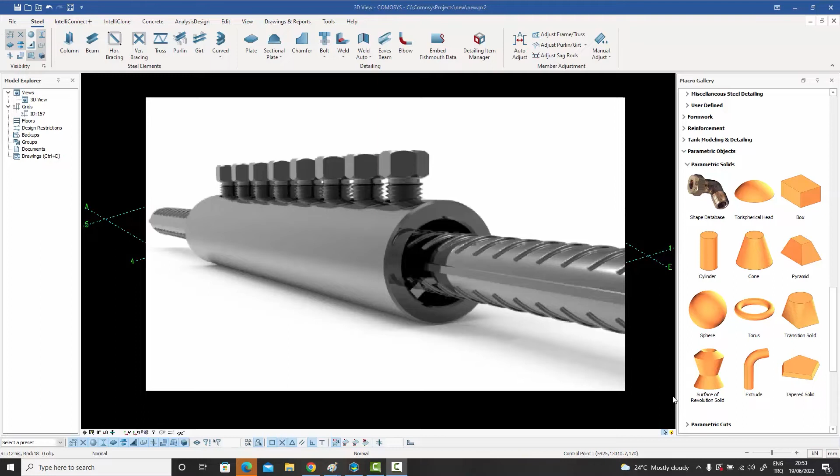So what could be examples of things you could make with the shape editor? It could be things like rebar couplers, for example, which are sold off the shelf. Different manufacturers have different types of couplers, and they all have different geometries. But the common thing is that they're available off the shelf. You just need to know the product code, and you can order as much as you want. So you could model your rebar couplers.

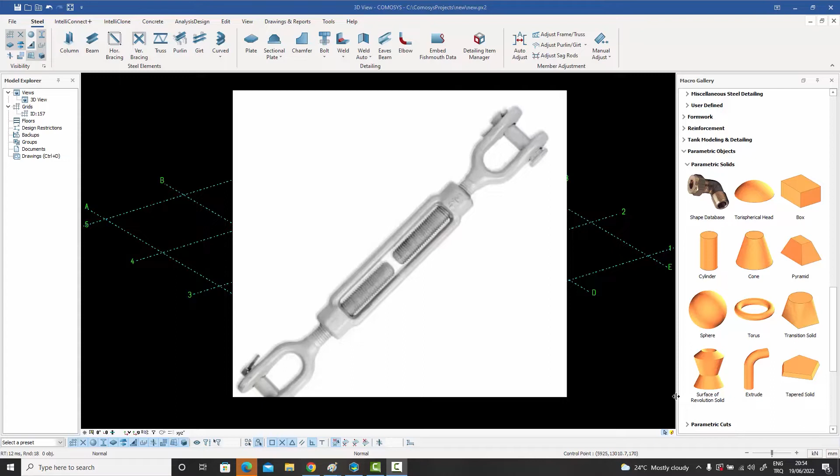Similarly, you could model if you have some standard embedded part in your concrete, which basically you just buy from some manufacturer. Or what you could also do is maybe model your turnbuckles, for example, in steel connections or in cable connections. This is once again an example of something which you buy off the shelf. So these are the kinds of things which you would typically create in Comosys using the shape editor.

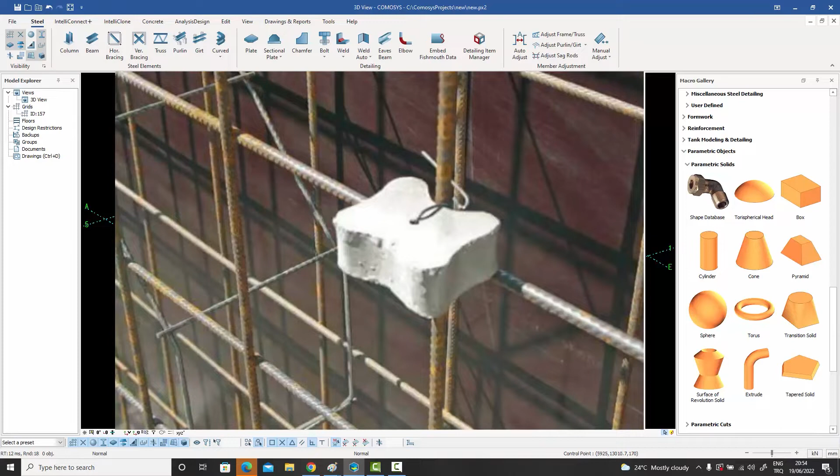For example, you could also use rebar spacers, which are used heavily in the concrete industry when you're laying the steel to ensure that the clear cover is maintained from all sides. All these are examples of things you might want to model in your 3D model, and you might want to show them. And for that, a very good idea would be to use the shape editor.

So how do we go about creating these shapes? Well, what we do is simply create these shapes by using these primitives on the right hand side. And it's not just limited to primitives. You can cut them if you want. You can use all your cut commands. You can even use the normal steel plate commands, for example.

Or even your beam column command. So if you're creating a little complicated object with a little profile in there as well, you can do all that. You can basically use any shape, and you can use multiple shapes, and then it will be combined into one final shape.

So you can use the primitives, like I said. You can create extrusions, you can create surfaces of revolution, you can use the basic primitives of a box, a cylinder, a cone, a pyramid, a sphere, a torus, or a transition solid, for instance. All these shapes can be used, and you can cut them, you can modify them, and finally the final shape which you are satisfied with will be put into the shape editor.

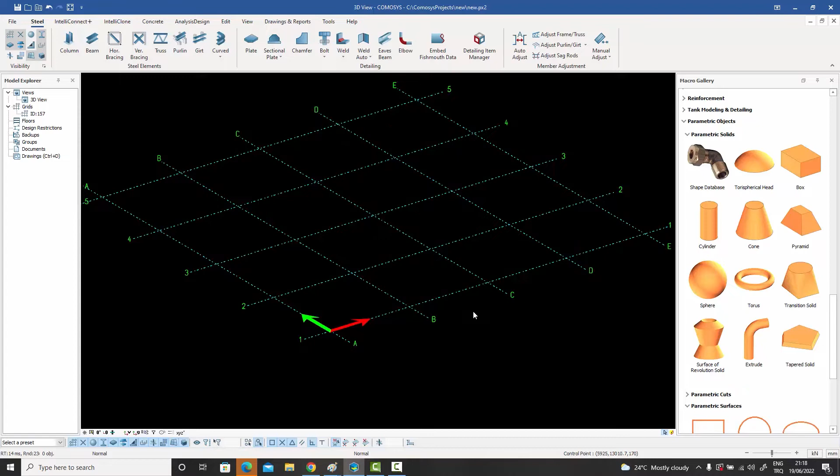So let's do a simple example over here. Let me zoom in and let's create a little box. Let me just select a point and right click, and immediately a box is created. Let me double click on the box. As you know, these are parametric objects, so you can double click on them and modify their properties. So I'm going to make the sides 200 on both sides.

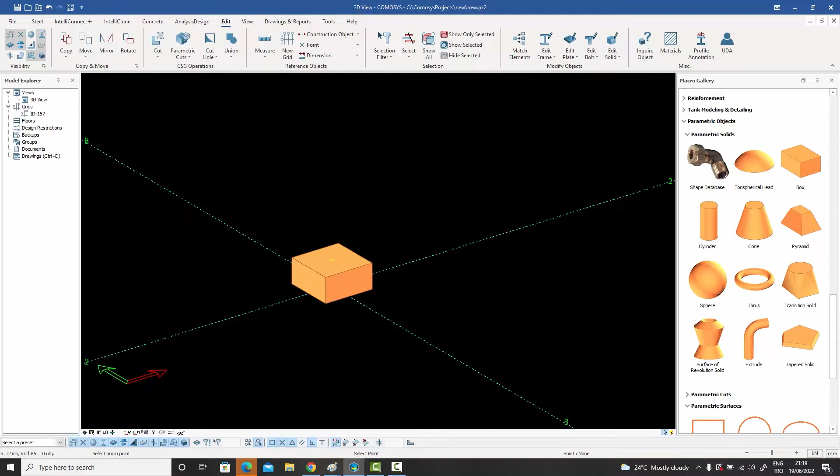Then what I'm going to do is create a little point in the middle. Let me just snap from there to there and create a dividing point, so I'll know this is the midpoint and the sides are 200. Let me go to my cone command, for example, select this point, and then right click.

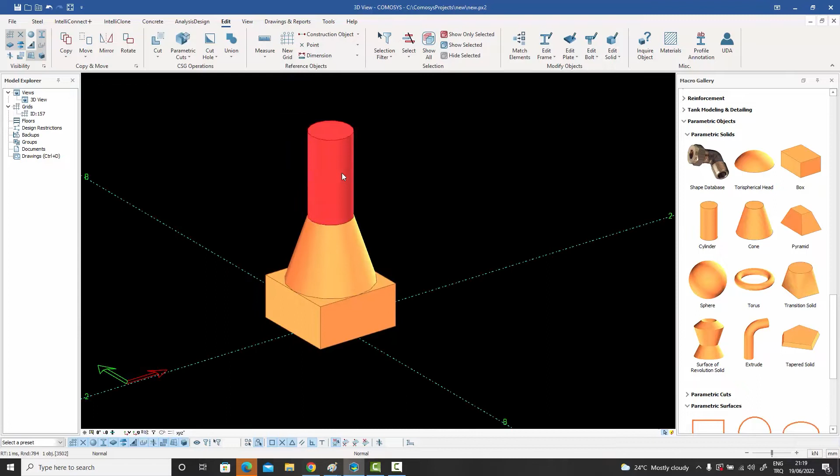And create a cone on top of that. Then what I can do is create another point, another dividing point, say from here to here. And I've got a point in the center. On top of this, I can put a little cylinder. Then I can double click on this one and give it a shorter height. For example, let's give it a height of 50.

Obviously, they're all parametric. You can keep on doing it, you can create much more complicated shapes, so I don't want to waste time on that. But the idea is that once you're satisfied with the shape, one more thing you need to do is, before you enter the shape editor, ensure that you have your origin set.

You can put your origin anywhere you want, so you have your origin points snappable. I want this point to represent the origin, this point to represent my x-axis of this entire shape, and then a point over here to represent my y-axis.

So as long as you have the points ready on the screen, because it's going to ask you for those points in a second when we go inside the shape editor, it's going to ask you where you want the origin to be. So the origin doesn't necessarily have to be at the bottom or at the other end. It can be anywhere you want it.

This will basically become your insertion point when you actually go about creating more and more instances of this shape. Whenever you enter this point, this is the orientation around which the object will be created. So what you do is, since I have the snappable points in front of me, all I need to do is select these shapes which I've created, and then enter the shape editor.

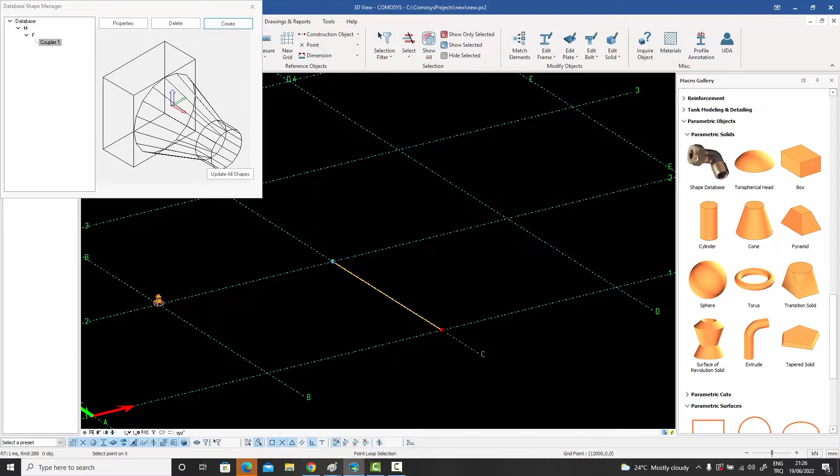Instead of vertically upwards for the x direction, let's select this one to be the x direction, and let's select this one to be the y direction. And when I do that, if I zoom in, you can immediately see that the insertion point is exactly that point, and it's pointing in this direction. I have created a copy of my original definition.

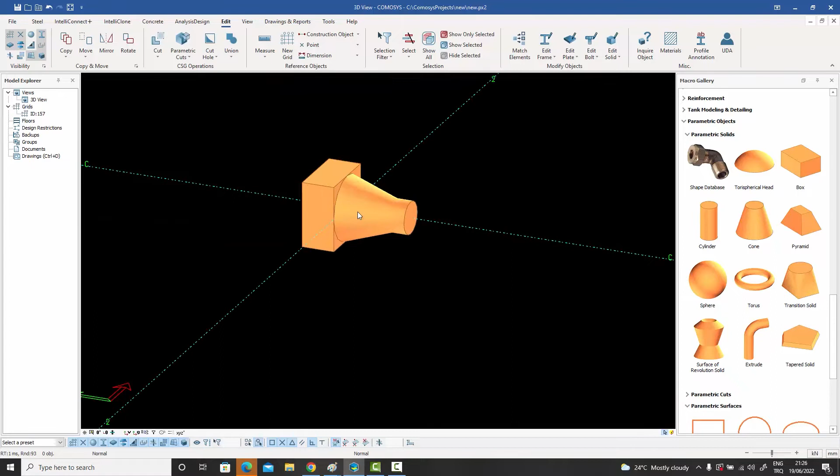Now what I can do is I can select this one, right click, say copy, say linear, and say okay, a distance of 500 - I can make 4 or 5 copies of this. And immediately copies of the same item are created.

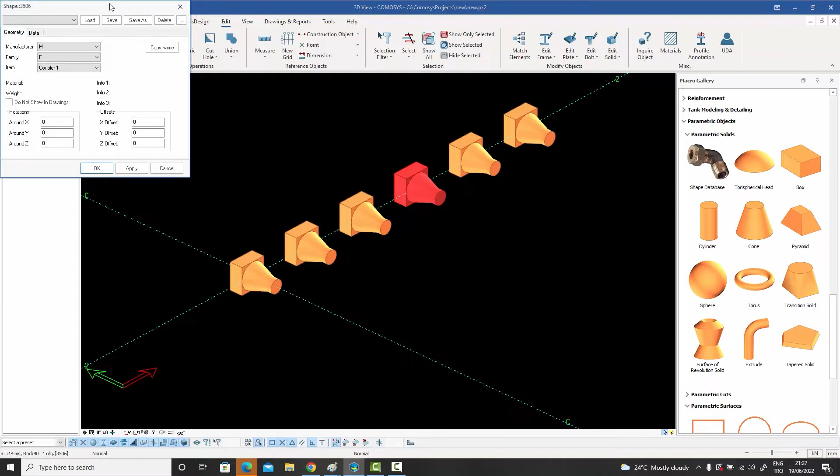And if I were to double click any one of them, you can see a slightly different version of the dialog box opens up. Over here we have the geometry tab, and over here we have the data tab. And in the data tab, we can give each and every individual one of these a different name also if you want.

I mean, normally these are off the shelf catalog items, so the default name could be coupler one, but you can give a modified name as well if you wanted to. And you can also give them user defined fields as well. You can select a material for them, a discipline for them, a usage for them.

If you want, you can even make them part of the numbering process, which is not normally required because these are, like I said, off the shelf items. But if you were to make some modifications on one of them and not all of them, you could make a cut on one of them, still theoretically put them through the numbering process, and you could also import them into the drawings.

That's the whole idea. And you can use all these other variables like exclude from dimensioning or do not annotate, or these are all the other variables which we've talked about in other videos. You can even give them formwork groups if you want to - basically all the generic solid fields you have at your disposal over here.

But coming to the geometry tab, we have a certain amount of control over rotations around the X, Y, and Z axis. So this is the X axis - now I've entered it like that, this is the way I've entered it. But if I were to give a Y rotation, a 90-degree rotation about the Y axis, this is what I can do. Or another 90-degree rotation around the Z axis, I can do that as well.

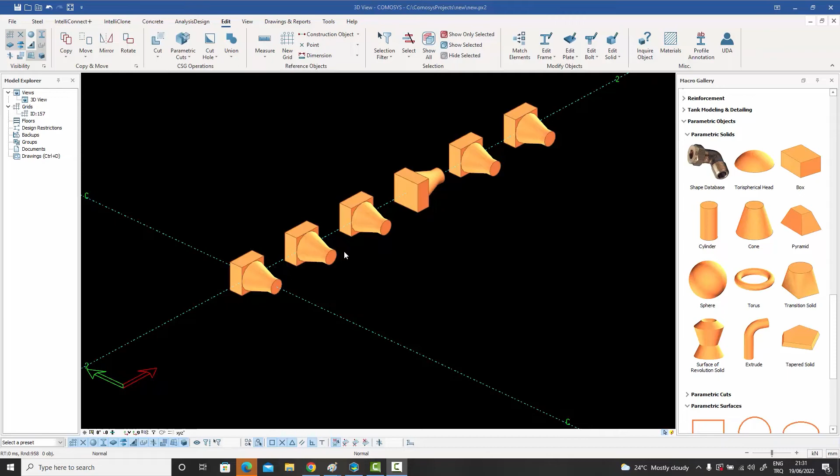Well, what we can do is redefine the shape. So let me go back to this definition area. I can recreate this - I don't have to keep the original versions.

For example, I can go and double click on this bottom one and make it a bit bigger - let's make it 250 instead of 200, so it's a bit wider. Secondly, I'm going to make this top one a bit longer, 120 instead of 50, the top cylinder. Let's say this is the way it should have been.

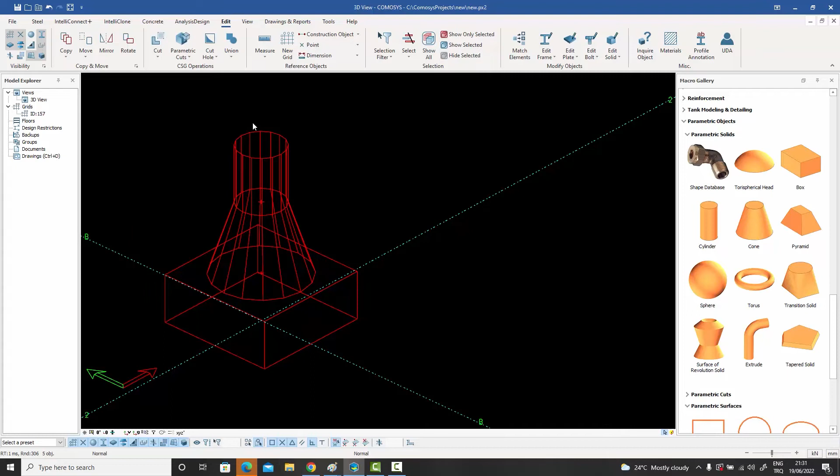Now, what you can do is just select it, like you did in the original definition of the shape. Go back into your shape editor, select the coupler, and this time go into the properties and press the properties button. Under the properties button you have lots of options, and there's one called change geometry, with a button for redefining the geometry, plus several other buttons as well.

These other buttons have to do with the level of detail, but for the moment let's focus on redefining the geometry. Since I've already selected the new shape, the way it should be, it's now directly asking me for the origin point again.

So I can select this point as the origin, select this point as the X direction, and for the Y direction I can select this point over here. Let me zoom in to ensure I'm not making a mistake. Yeah, that's the point. And when I do that, this is now redefined into the new shape.

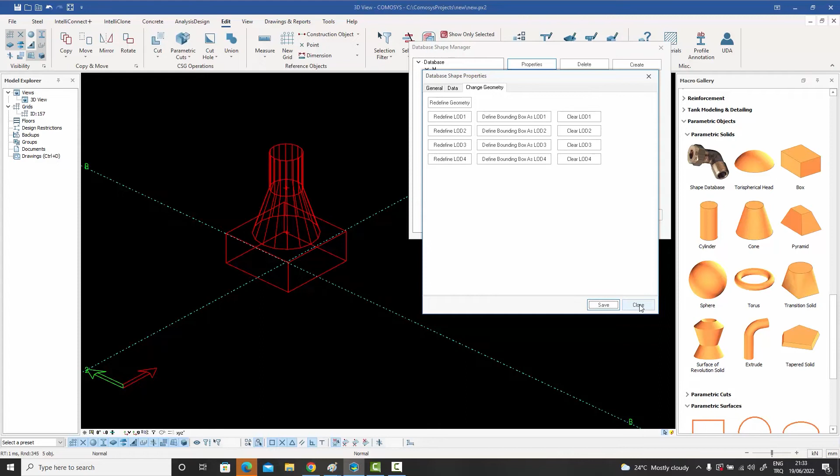So if I say save, now the database has been changed. But the instances which we created - now I'm going to say close - the instances which we created are still the same.

And for that, what I need to do is press this button called update all shapes. When I do that, this new redefined geometry is applied wherever, or however many times, I've used this shape in the model.

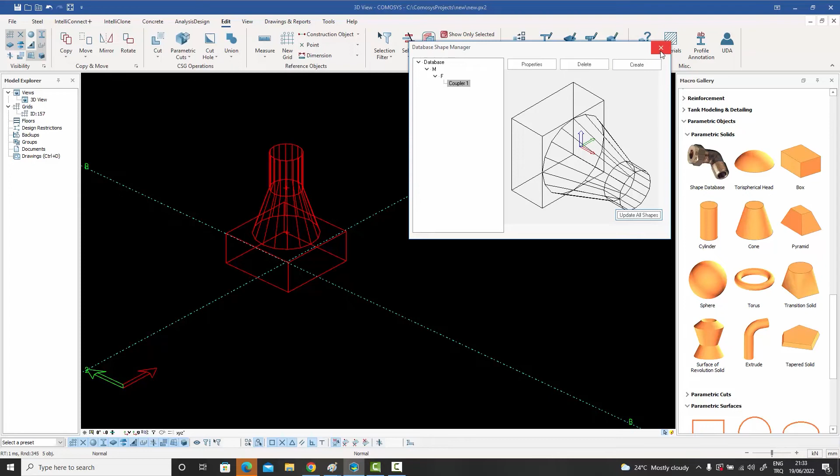So when I do that, it's changed, and now I can just turn this off and zoom in to the location where I had created them. As you can see, they have all been modified - the base has become wider, the top cylinder has become longer. So my original definition has been modified everywhere in the model.

Now, one more important topic I need to talk about is level of detail. As you know, these shapes can get complicated, much more complicated than this one I just created on screen, consisting of lots of circular or spherical parts. They could get so complex that if you have hundreds, thousands, or tens of thousands of copies in the model, your model could become very heavy, difficult to render, and slow you down.

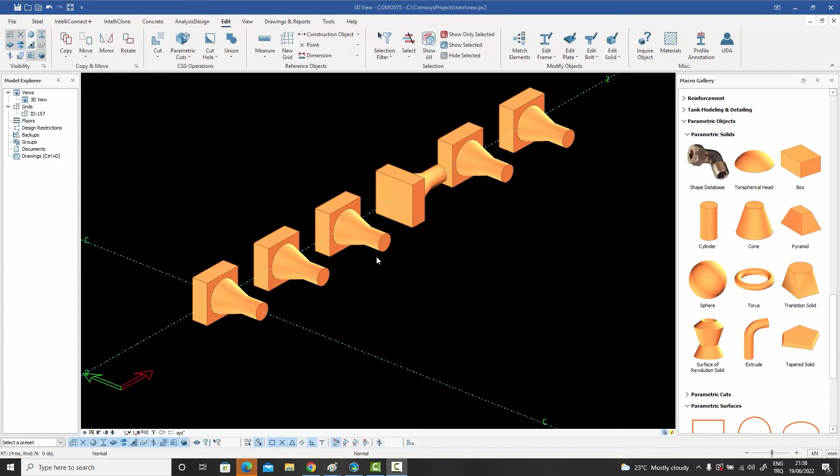So what we have in Comosys is the option of creating a level of detail. That means when you're really, really close, the full shape is shown to you. But when you zoom out, at appropriate distances the program simplifies the geometry to a much lower number of polygons, and as you go even further, you can modify it even more.

Basically, you have an option to define 3 or 4 levels of detail. You can eventually define that when I'm really, really far, I don't even want it to be drawn, or I want it to be drawn just like a small line, for instance. Or if I'm at this level, I want it to be drawn as a box, for example.

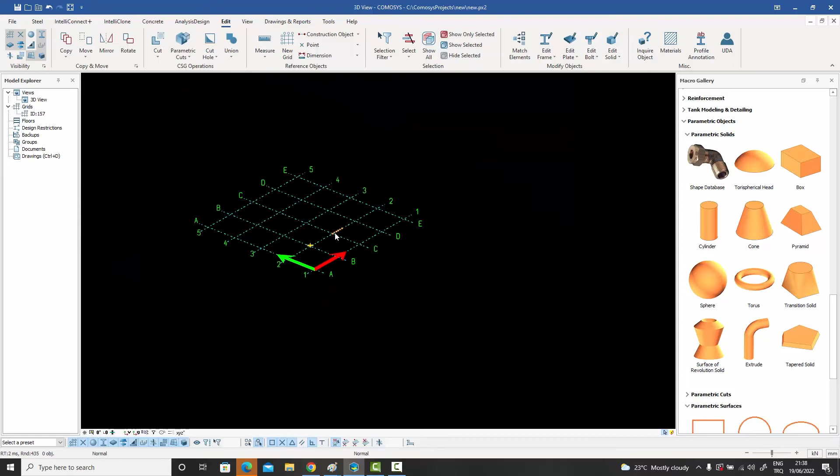And when I'm at this level, I want it to be drawn as a line. And when I'm at this level, I want it to be drawn or not drawn at all, or something. This is what we call level of detail.

If you remember, we went inside and selected these, and went into the shape database to redefine, and we selected this one. It said properties, and inside the properties there was a change geometry tab which we used to talk about redefining the geometry.

But what you can do is redefine the level of detail geometries as well. So this is the basic geometry—this is the full geometry, rather, the actual geometry of the shape. But you have 4 more geometries you can enter on top of that, which would be simplified versions of the original geometry.

So this would be the simplified level 1, which you would see when you're slightly far. This would be the simplified level 2, when you're a little further. This would be level 3, and this would be level 4.

And you can also create primitives for those drawings as well. So you can define that when I'm at LOD1 level, I just want this whole thing to look like a box, and you can create a box in this redefine. But you've got certain easy features too—if you just press this one, it's going to convert it into a bounding box from LOD1 level.

You can convert all of them into bounding boxes, or you can empty them—you can clear that level as well. What that would mean is you can clear that and enter a line or something like that, and by redefining the LOD level, it will turn into a line.

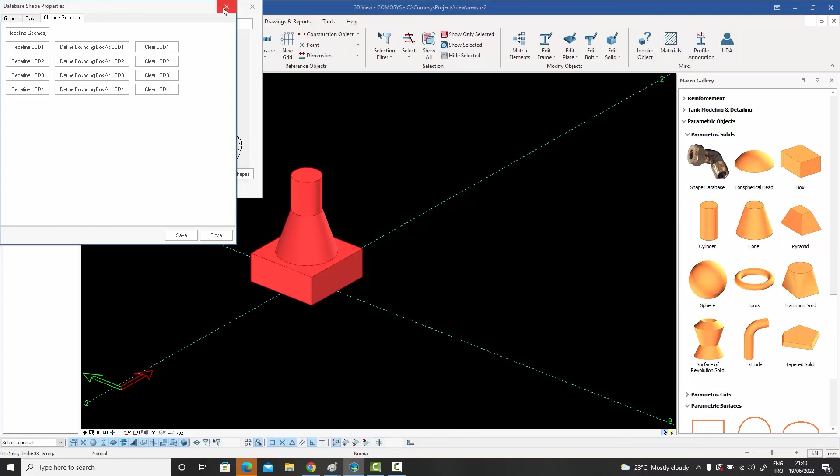So these are a bit advanced options, but the point I'm trying to make is that when you have a model, you don't need to use this 99% of the time, because COMOSYS will automatically create the level of detail for you. For example, when you use primitives, this circle is divided into 32 different sections because it's circular. Automatically it's going to create levels of detail—instead of 32, use 16, then 8, then 4, then 2. It's going to do that even if you don't tell it.

But if you want to override those standard behaviors, you have the option of using those commands which I just showed you.

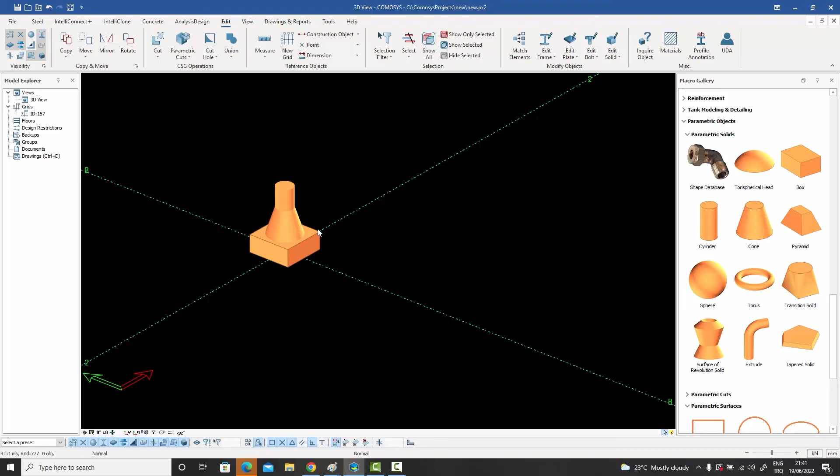So to summarize, you will use the shape editor whenever you want to model something which you're going to buy off the shelf, and you have lots and lots of those in the model. If you have just one, you don't really need to create the shape editor. But if you've got dozens or hundreds or thousands of those things repeating in the model, it's a much better idea to use the shape editor to model them and put them in your company catalog.

And the good thing about that is your people will be able to use that definition in other models as well.

All you need to do for that is, for example, go to the preferences directory and scroll down—you will see a file called shape database somewhere. So yeah, there it is. It's an XML file, and this file will contain all the shapes you have created in your shape editor, and you can just exchange these files between your team. Your team can take them from each other, or you can have a company-wide file.

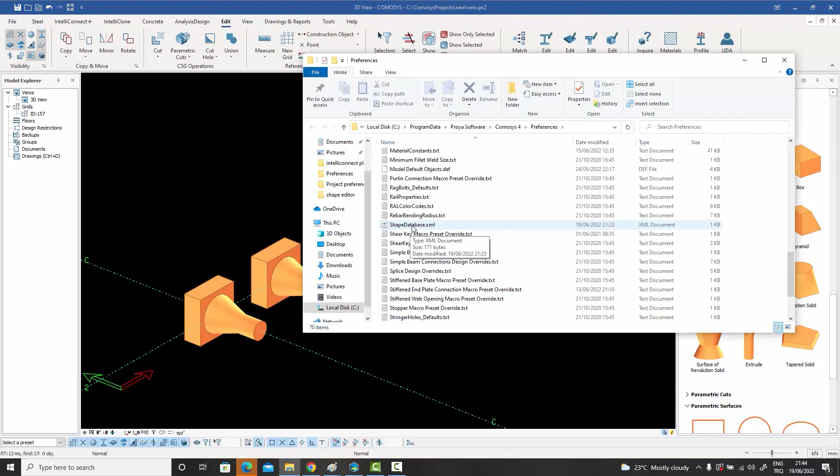Basically, all the things which you create, you can make project specific, and you can copy it over here. So that's a very nice way of storing away your shapes for your company.

And like I said, I've already mentioned the various uses—you could use them for rebar couplers, concrete spacers, standard embedded parts, or basically anything which you feel you might need a specialized shape for, which you also need to model, but it's going to be bought off the shelf.

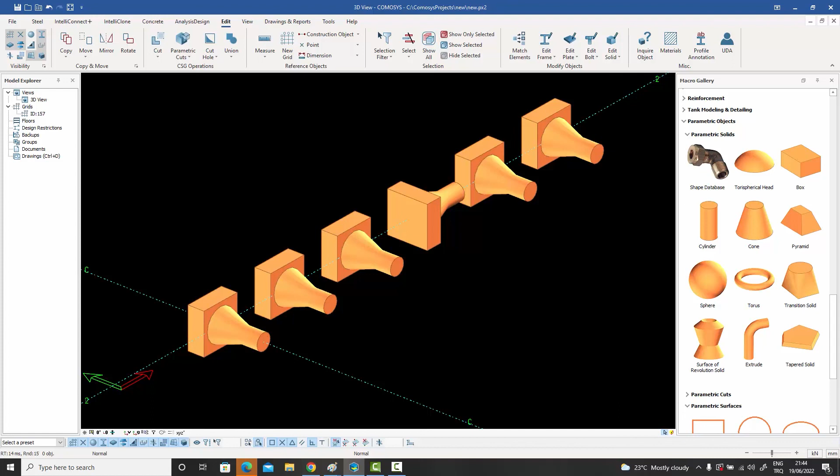And then you can import that into your drawings. You can create your material lists based on that as well. So this is a very nice feature which will make the general modeling capabilities of COMOSYS very powerful for you, and it will give you the capability of creating very impressive models for your clients.